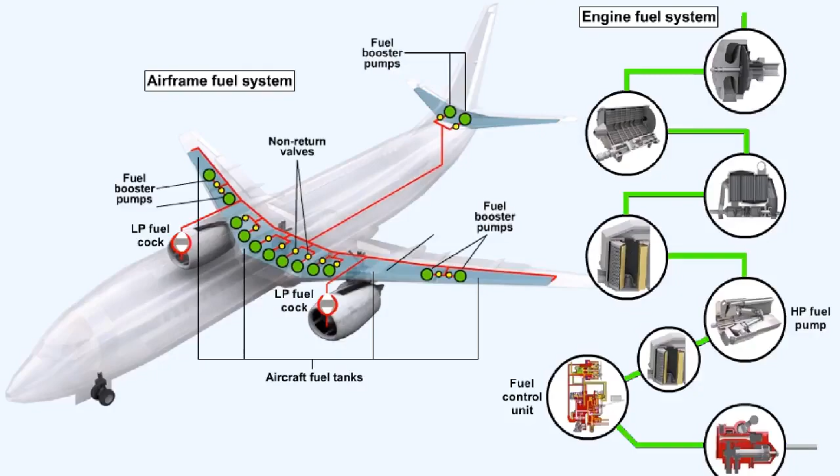After it's passed through the low-pressure fuel cock, the fuel then enters the engine fuel system and is delivered to the low-pressure fuel pump.

The low-pressure fuel pump is sometimes called the backing pump, because it will attempt to back up the fuel supply to the engine in the event of failure of both of the booster pumps in the wing tanks.

The low-pressure fuel pump is used to supply positive fuel pressure directly to the high-pressure pump. By maintaining a positive pressure, the low-pressure pump minimizes the chance of cavitation occurring at the inlet of the high-pressure pump.

The low-pressure fuel pump is driven by the engine's accessory gearbox, which itself is driven by the high-pressure compressor shaft.

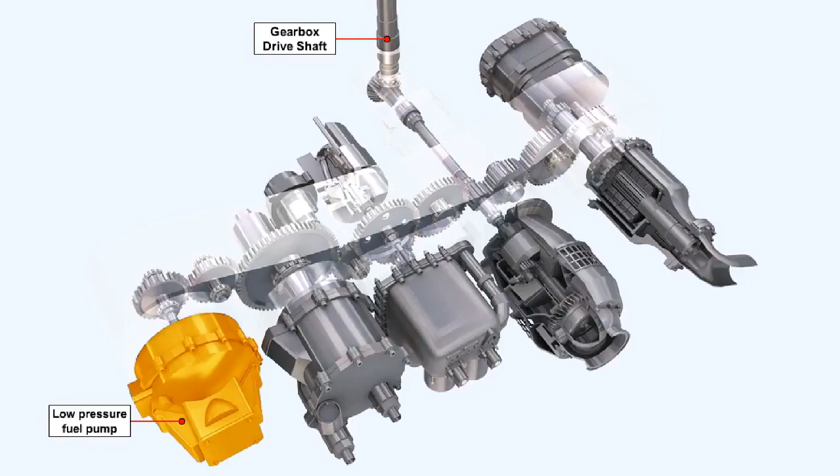A fuel-cooled oil cooler is fitted in the majority of gas turbine engine installations. The oil cooler serves the double purpose of cooling the oil and also heating the fuel.

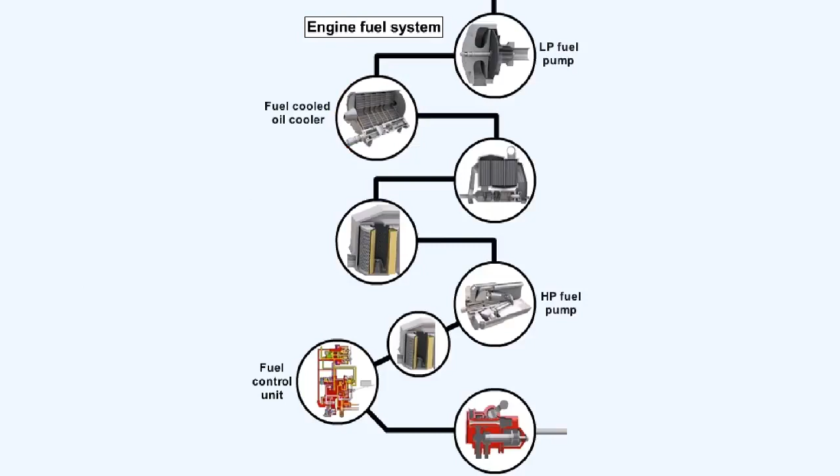By raising the temperature of the fuel, the oil cooler eliminates the formation of ice crystals, which may block components downstream in the fuel system.

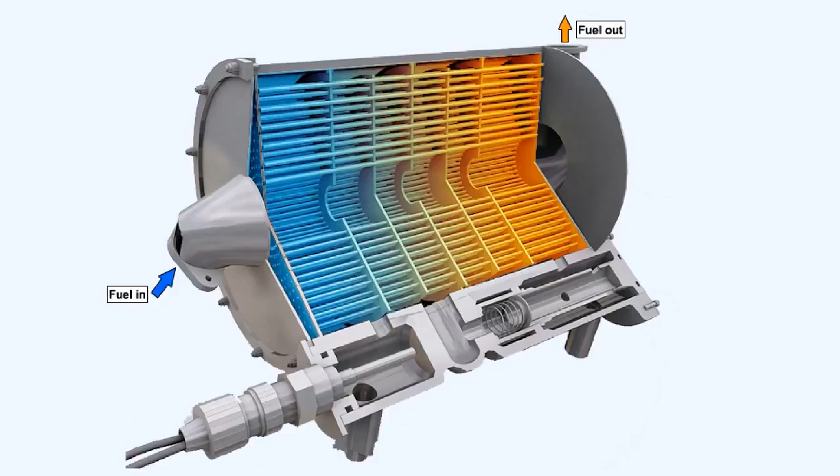The oil feed line to the fuel-cooled oil cooler incorporates a pressure-maintaining valve. This valve keeps the oil pressure in the cooler higher than the fuel pressure.

If the oil cooler does develop an internal leak, then the fact that the oil pressure is higher than the fuel pressure will ensure that the oil leaks into the fuel system, rather than the fuel leaking into the oil system, which could be very dangerous.

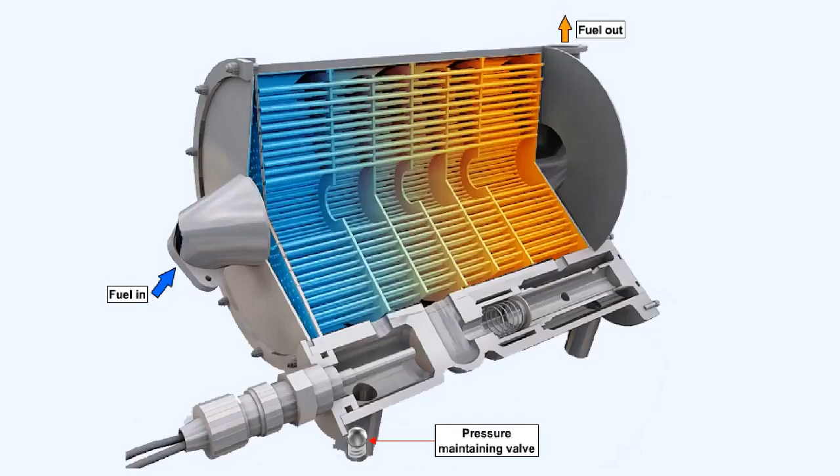The fuel heater assists in the warming of the fuel, and thus the elimination of ice crystals. The fuel heater, working in conjunction with the fuel-cooled oil cooler, uses compressed bleed air to warm the fuel to automatically maintain a predetermined fuel temperature.

The automatic temperature control can be achieved by the action of a Vernatherm thermal actuator. The thermal actuator incorporates a material which is sensitive to temperature change.

This is used to open or close a valve, which regulates the entry of hot air into the fuel heater from the engine compressor.

The low-pressure fuel filter is the first line of defense, protecting the delicate control components within the high-pressure fuel pump and the fuel control unit from the effects of dirt or contamination.

The low-pressure filter is usually a replaceable paper filter element, which is capable of filtering out particles larger than 50 to 100 microns.

The flow meter measures the instantaneous fuel flow in gallons per hour, kilograms per hour, or pounds per hour. The flow meter may also include an integrating system, which can add the total amount of fuel used. There are basically two types of flow meter in use on large jet aircraft: the vane type and the mass flow measuring type.

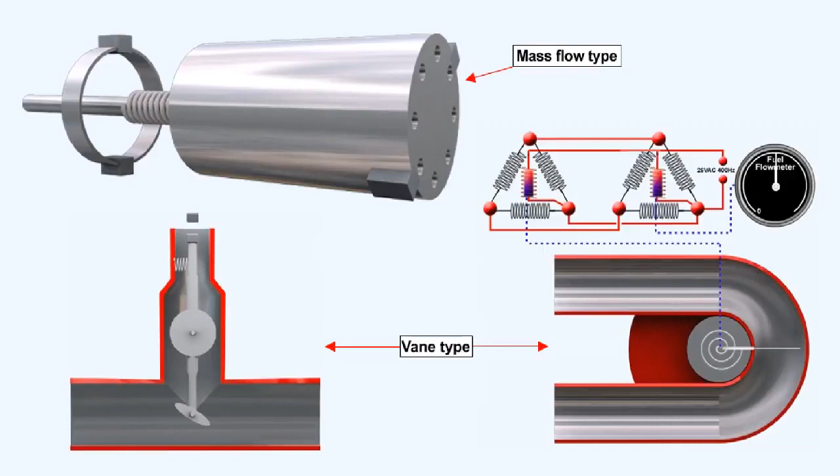The vane type of fuel flow meter, which is fitted to older aircraft systems, is designed to measure volume of flow. The flow meter consists of a vane which is moved against the force of a restraining spring by the volume of fuel flowing past it. This system is not too accurate.

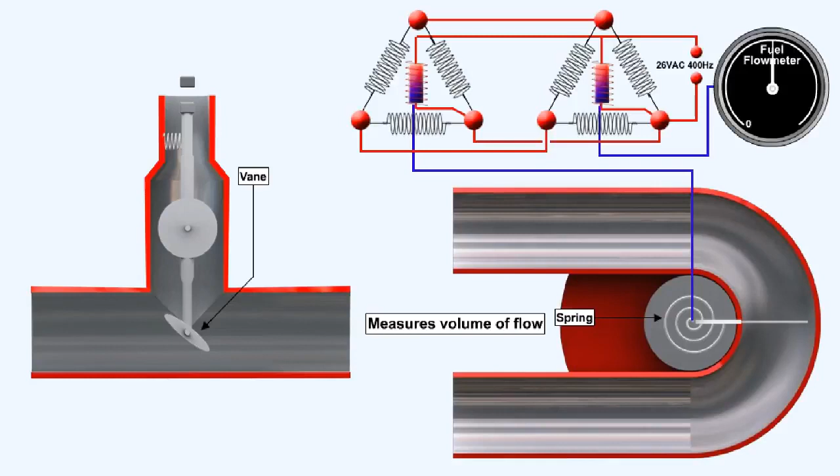The mass flow type of instrument can be accurate to within plus or minus 1%. Fuel flowing through the instrument rotates both a drum and a spring-mounted impeller, which have magnets fixed to them. Movement of the magnets is sensed by pickup coils, which translate the difference in angular displacement between the magnets into a mass flow rate.

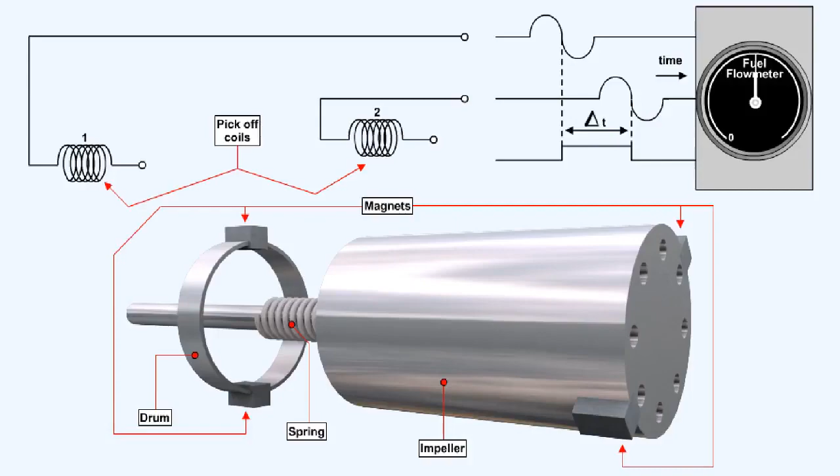The fuel temperature is sensed as the fuel leaves the fuel heater. Fuel temperature is indicated on the flight deck to allow system monitoring.

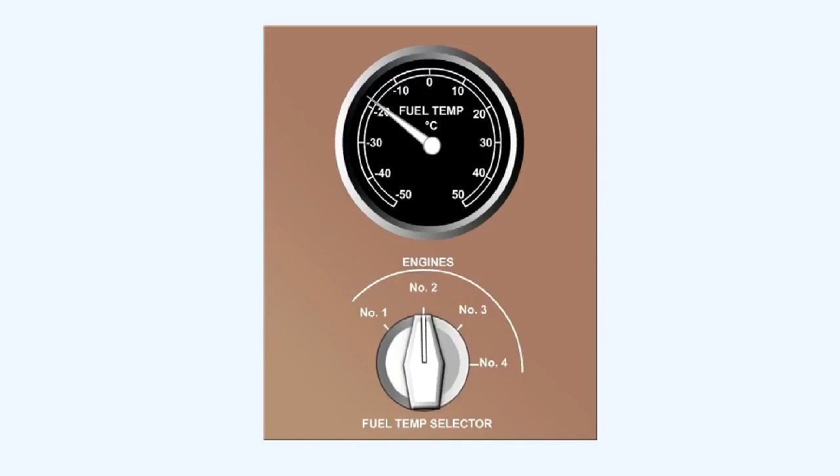The fuel pressure is sensed as the fuel leaves the low-pressure fuel filter. Fuel low pressure may be indicated by either an LP fuel warning light or the activation of warnings on the EICAS or ECAM, depending on aircraft type.

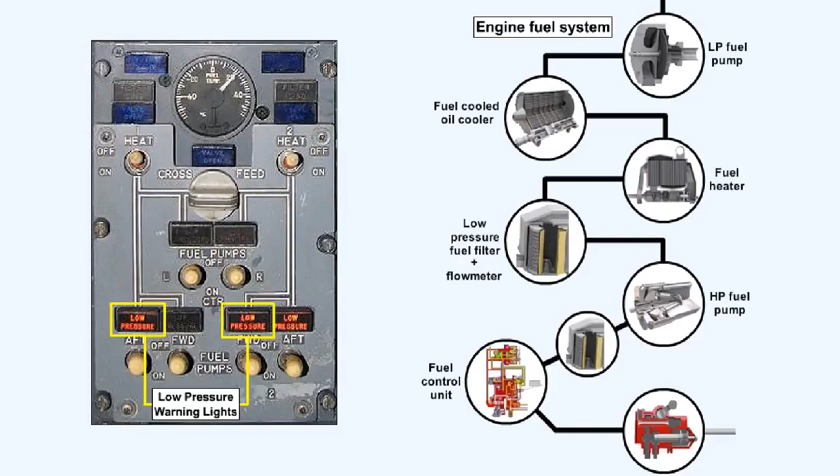The high-pressure fuel pump is fitted to and driven by the engine accessory gearbox. The engine accessory gearbox itself is driven by the high-pressure compressor shaft.

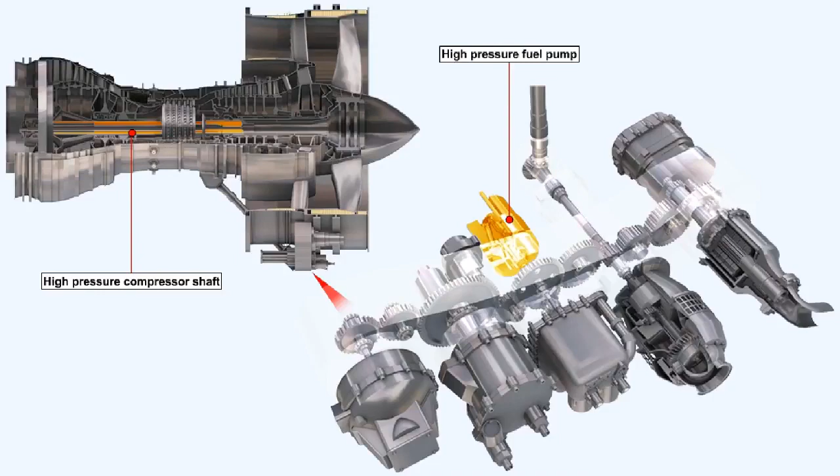The high-pressure fuel pump illustrated is representative of one type of pump employed. It's a plunger-type pump. It can be used as a single unit if the volume of fuel required is not too great, but in larger engines, two units can be driven together to supply a greater fuel flow.

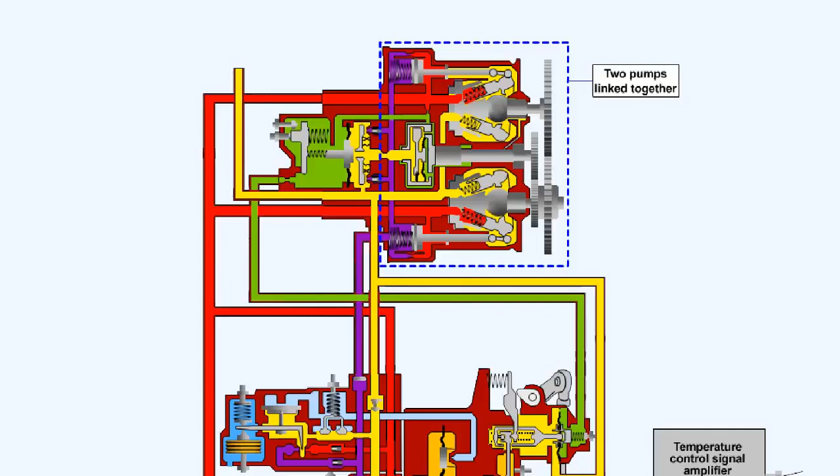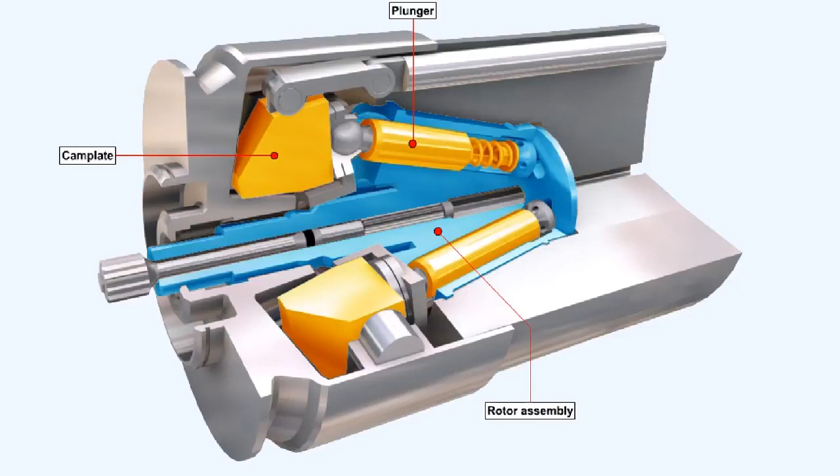Several plungers are fitted on a rotor assembly. The plungers are rotated against a stationary cam plate, which causes them to reciprocate within the bores that contain them on the rotor assembly.

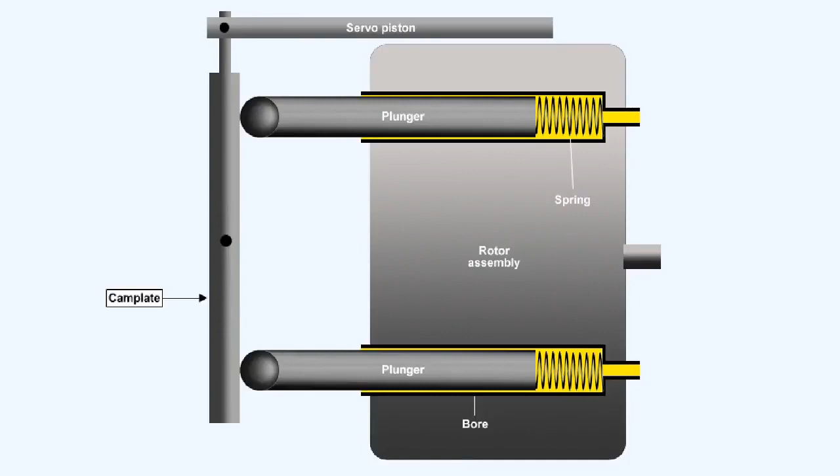The distance that the plungers move during this reciprocating action is dictated by the angle of inclination of the cam plate. Here we see the cam plate angled so that the plungers stay in the same position in their bores as the rotor drives them round.

Now the cam plate angle is such that the springs force the plungers to their maximum stroke when they are at the top of the cam plate, sucking fuel into the bores. And the cam plate forces the plungers to their minimum stroke when they are at the bottom of the cam plate, forcing fuel under pressure to the outlet of the pump.

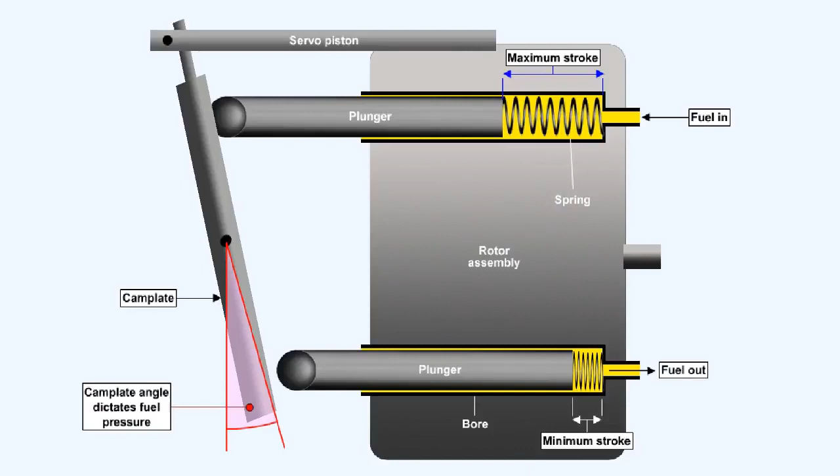The angle of inclination of the cam plate is controlled by a servo piston, which itself is controlled from the fuel control unit.

Most fuel systems incorporate a fuel filter into the output of the high-pressure fuel pump to prevent very fine particles entering the extremely small passageways inside the fuel control unit. The fuel filter is composed of a number of wire mesh screen discs.

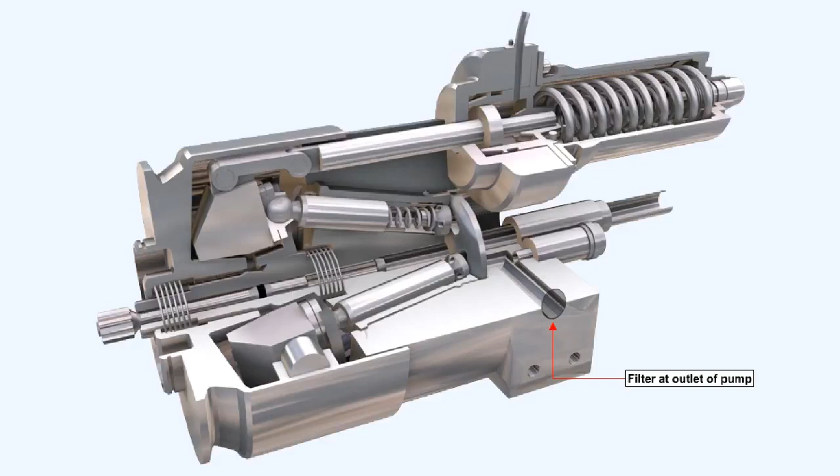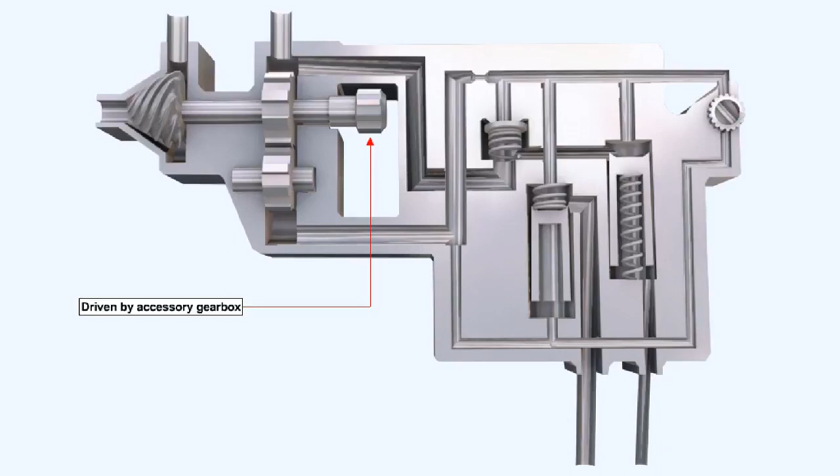The spur gear type fuel pump is simpler and lighter in construction than the plunger type fuel pump, and like the plunger type pump, the spur gear type pump is driven by the accessory gearbox. The output of the spur gear type pump is directly proportional to its rotational speed.

The fuel control unit controls the fuel flow to the burners for every thrust setting. There are two types of hydromechanical fuel control systems still used on gas turbine engines: the pressure control system and the proportional flow control system.

The proportional flow control system is the more popular of the two types because it is more compact than the pressure control system, and it's not sensitive to the effective flow variations that occur downstream of the throttle. The proportional flow control system is the type we'll use to describe the individual parts of a fuel control unit.

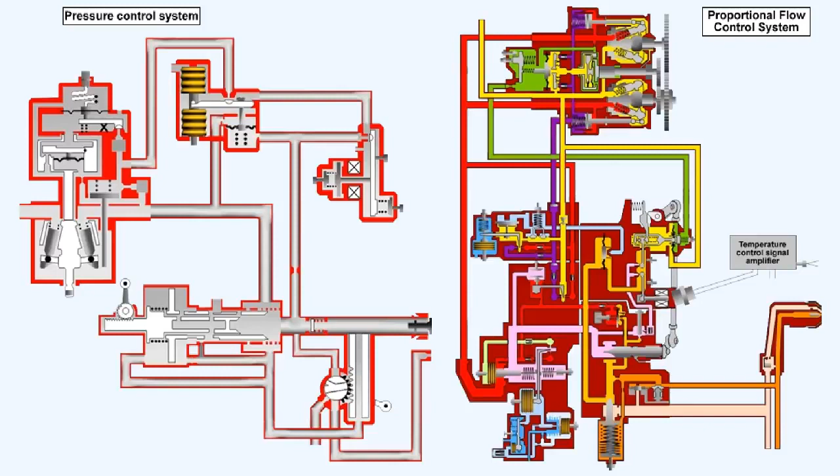Various devices within the fuel control unit are used to adjust the fuel flow to cater for variations in air intake pressure, engine acceleration control, exhaust gas temperature, RPM limiting, and compressor delivery pressure.